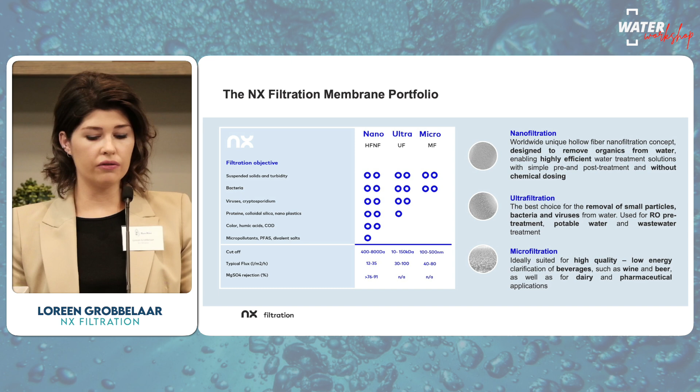The nanofiltration range has 2 products, the DNF80 and the DNF40. The 40 is a 400 Dalton cutoff, while the 80 is an 800 Dalton cutoff. These membranes were specifically developed to remove organics like your CODs and also micropollutants from the water.

This is basically without chemical dosing, so you don't need your coagulants and flocculants—almost a one step process. Our ultrafiltration range ranges between 10 and 150 kilodalton, and this is mostly for RO pretreatment or wastewater treatments, for virus and bacteria removal. Microfiltration is mostly used in the food and beverage industry, and our membranes are applied to clarify beer and wine.

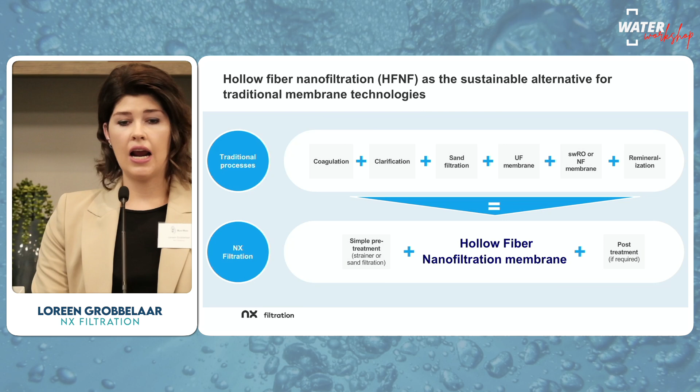Focusing on the nanofiltration range, we've seen in many cases that a traditional process—including coagulation, flocculation, sand filtration, UF and RO, usually with a remineralization process afterwards—can be condensed into a simpler treatment step.

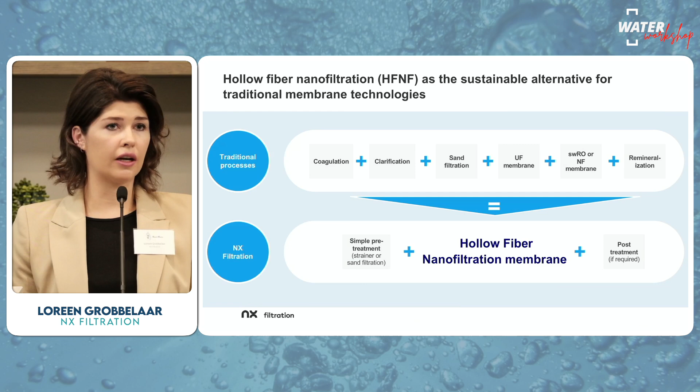Taking for instance a simple pre-treatment like a strainer or in some cases a sand filter, and applying that filtrate to a hollow fiber nanofiltration system with a post-treatment can give you the same water quality or even better.

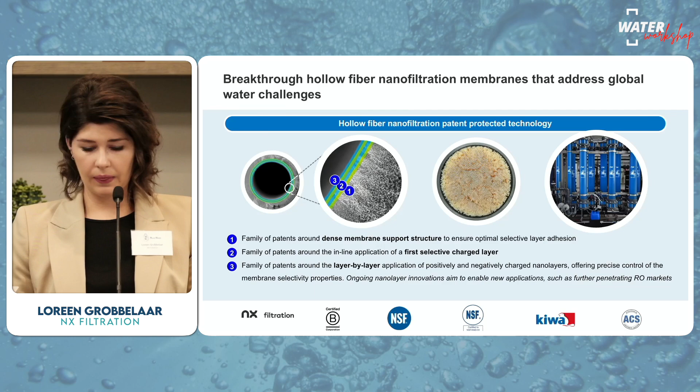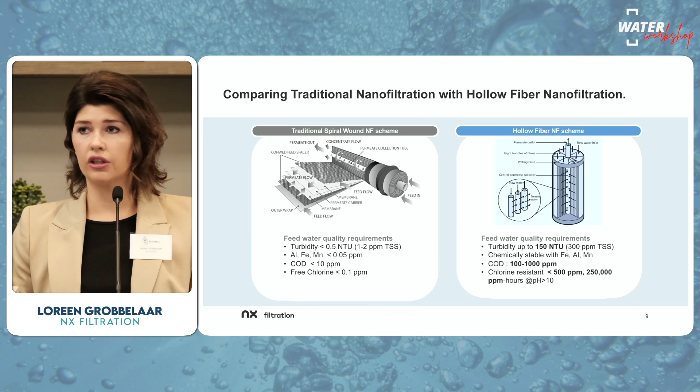Our membranes are chlorine resistant, so they can take chlorine up to 250,000 ppm hours at elevated pHs above 10. These membranes are also backwashable, so in many cases you would need quite extensive pre-treatment with your spiral wound nanofiltration membranes, which is not necessarily necessary for the hollow fiber membranes.

On the wastewater reuse side, we also do municipal wastewater. That's one of the sweet spots for our membranes. So after clarification, after the clarifiers, with a drum screen, followed by the nanofiltration membranes. The permeate can then be reused or even further treated for potable reuse. But I'll say more about that later after the tea break.

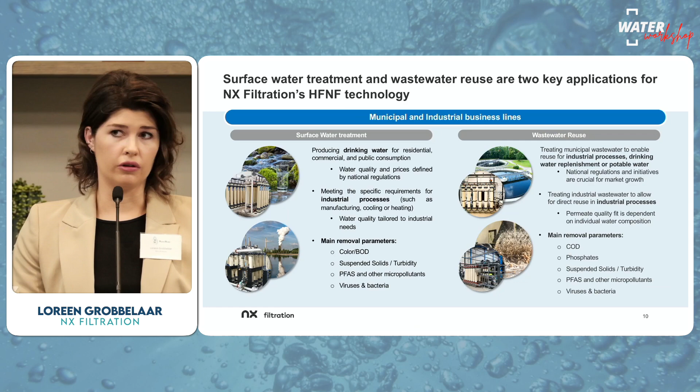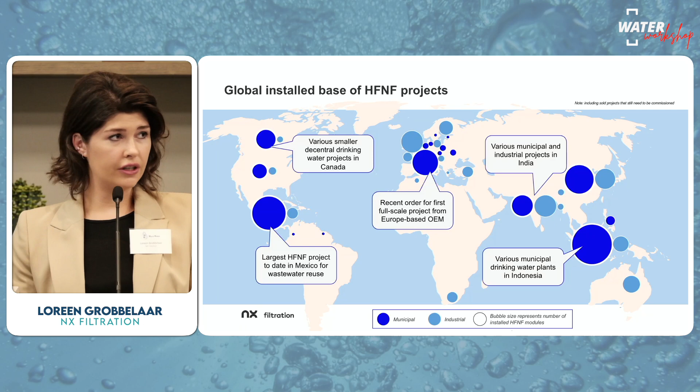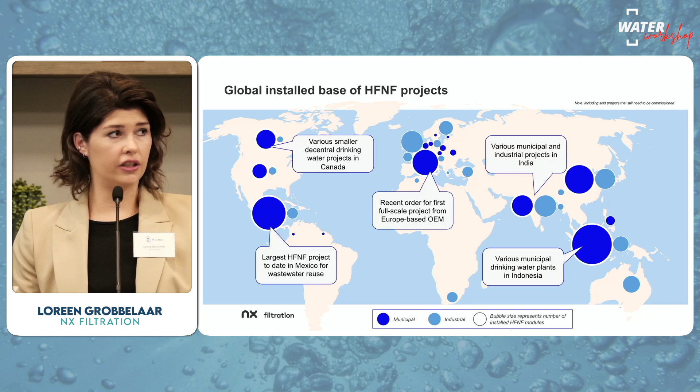Globally, we do have an installed base of nanofiltration membranes, mostly in the European region where we are based. But this slide is just to indicate that we also have installations in other countries in the world, also in Asia, Indonesia, Australia, and also Northern America.

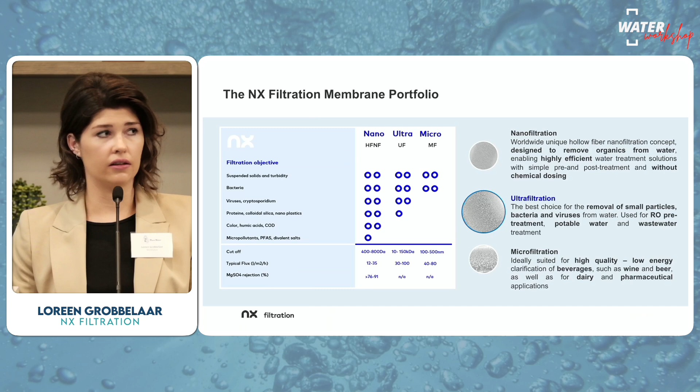Bringing up the slide again to highlight the ultrafiltration range. Like I've mentioned, smaller particles, 10 kilodalton to 150 kilodalton. The tighter membrane, the 10 kilodalton, is used mostly for silica removal, while the UF150 is the membrane usually used for RO pretreatment, for instance.

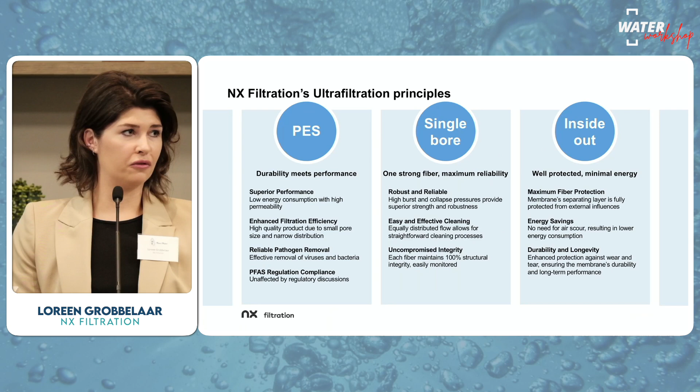Our filtration principles also apply mostly for the nanofiltration. All our membranes are PES based. They are single bore and inside out. So with the PES membranes, should you use our membranes, you could be covered for future regulations where PFAS could become an issue.

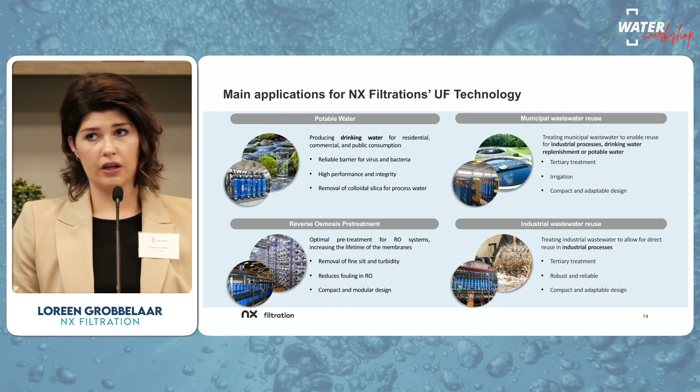On the ultrafiltration side, the main applications would be potable water, municipal wastewater reuse again, and reverse osmosis pretreatment. That's where we mostly apply our ultrafiltration membranes, and then also in industrial wastewater reuse. We've got a global base of ultrafiltration membranes, which might be something new to you because we are a nanofiltration company, right? So I will cover a little bit later that we also have a few replacement products available for the membranes currently in the market.

Just an overview of where we apply our ultrafiltration membranes. Water reuse in a poultry processing plant in Central Europe. Our membranes are applied after a sand filter, just before reverse osmosis, and I believe this water is then being reused in the factory again.

Here we use our WMC200 UF 150, so 150 kilodalton membranes. There are 4 skids, 40 modules per skid, and the membranes have been operating for more than 6 years. Fluxes of 40 to 50 LMH have been reached.

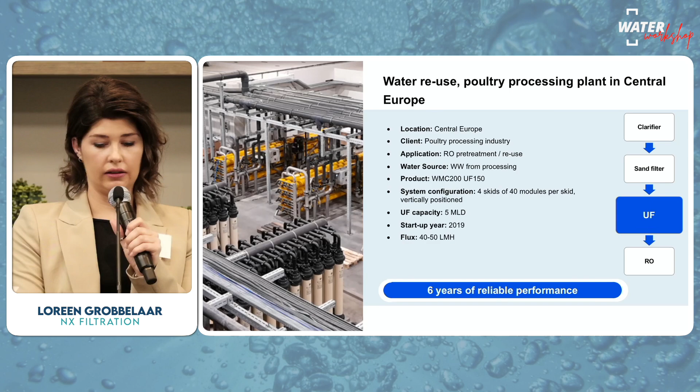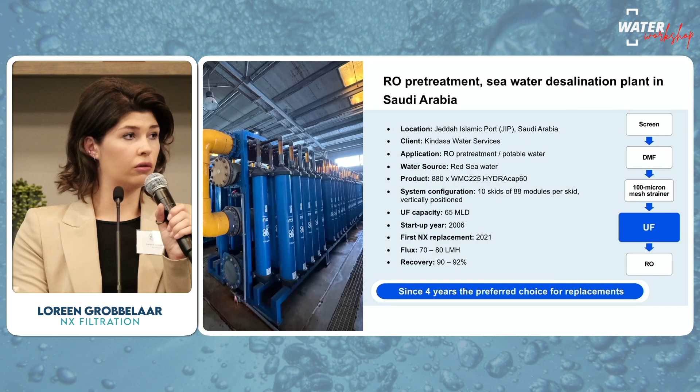RO pretreatment, so seawater desalination, this is in Saudi Arabia. At the port of Jeddah in Saudi, we have a customer, Kindasa Water Services, which was also one of the good performance declarations I've shown earlier. This is to treat the seawater from the Red Sea. There we've got 880 modules installed, the HYDRAcap60, which you might be familiar with from the Hydranautics range. System configuration, again, 10 skids, 88 modules, and our first replacement was in 2021. High recoveries of 90 to 92%, and this is also just before reverse osmosis, more than 4 years.

Then a seawater desalination plant again in India. Also 30 skids, 120 modules, and here we've got one of our most recent developments of ultrafiltration membranes installed, 55 square meters, and that's also UF 150. We're operating at fluxes of 80 LMH and reaching an SDI of less than 1. Again, lamella clarifier, disc filters, ultrafiltration, and then reverse osmosis.

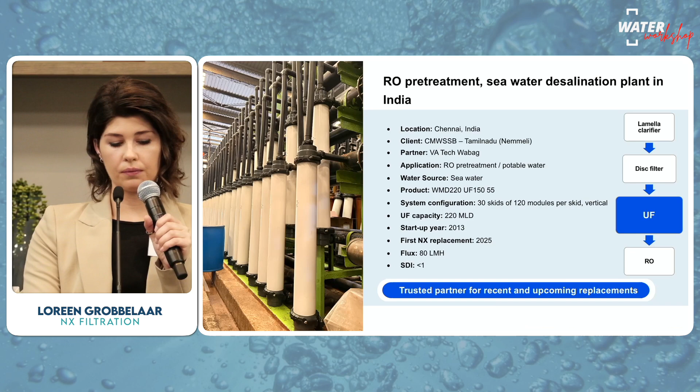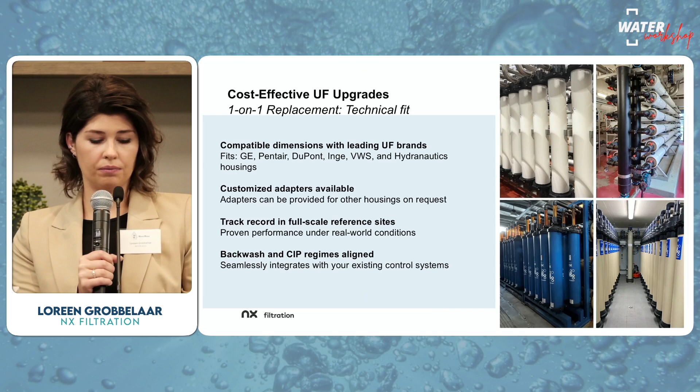Like I've mentioned, we can replace our membranes cost effectively with a one-on-one replacement. It's a technical fit with most of the membranes currently in the market, and our membranes can fit GE, Pentair, DuPont, Inge, Hydranautics, and also VWS. In cases where we do need adapters, we have those available, so we can do a retrofit, or assist with a retrofit to your needs. All of our membranes are backwashable, and the normal CIP and cleaning ways are acceptable.

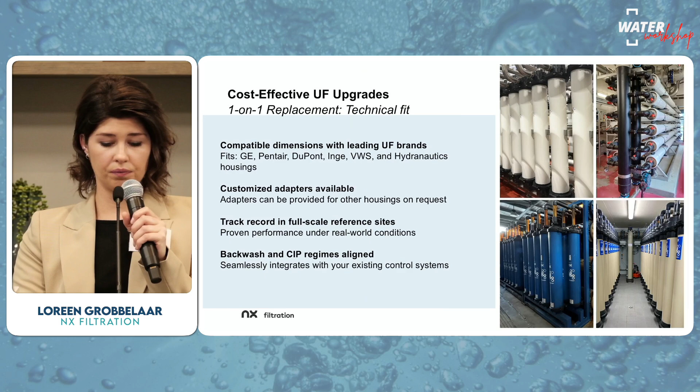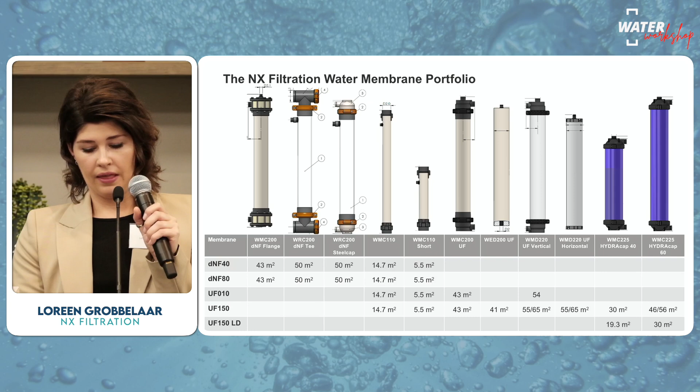So yeah, I believe if you would like to discuss any replacement projects, I'm more than happy to discuss that further.

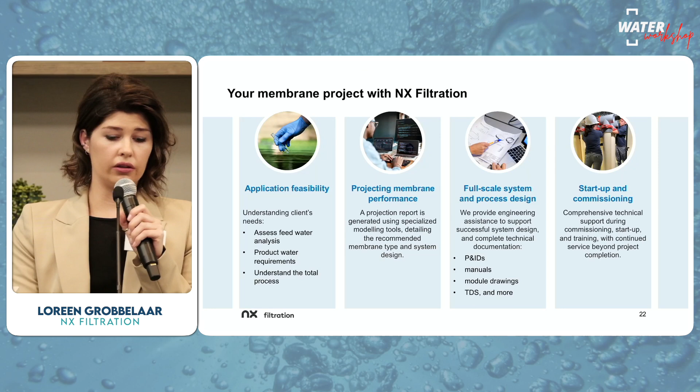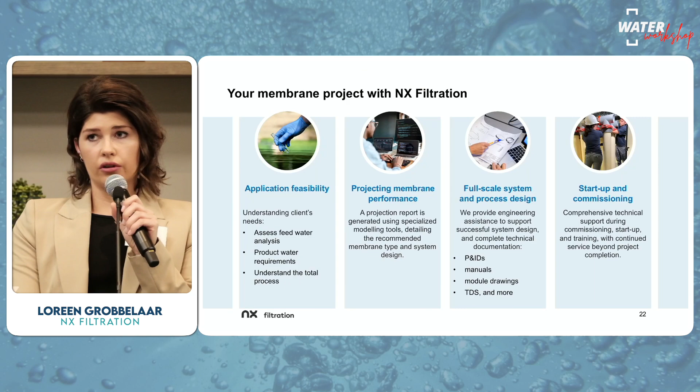Should you want to develop a membrane project with NX filtration, we do application feasibility checks within our sales engineering team. We have our own in-house projection software, so we usually assist with that. We also assist with full-scale system design, so should you need information or assistance checking P&IDs, we have that expertise within our team.

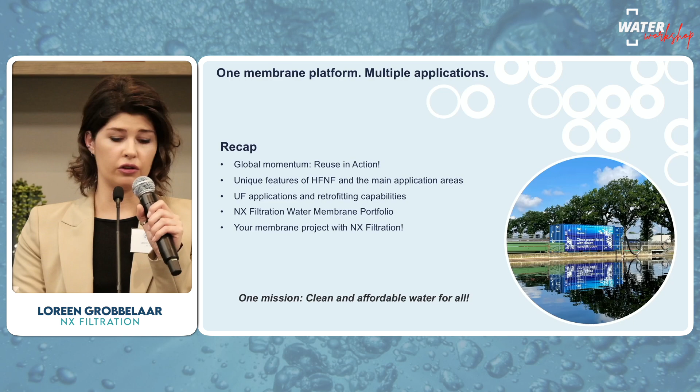So just to recap, I mentioned a little bit the unique features of HFNF and the main application areas, which is surface water and wastewater treatment, as well as UF applications and retrofitting capabilities, our membrane portfolio, and how you can develop your project along with us. I think in the end, we've all got one mission, and that is our motto at NX Filtration: clean and affordable water for all. So, thank you.

Basically, the PVDF manufacturing of PVDF membranes would eventually become subject to regulation, where PVDF would fall under the PFAS regulations or micropollutant regulations, and that is where we are already covered from a manufacturing point of view, to be all right with continuing our manufacturing.

So does that mean that people making PVDF membranes... I mean, it's kind of bizarre. You're making membranes to treat water that are causing a PFAS problem. Is the PVDF manufacturing using PFAS material? Is that what it is? Yeah, that is it. I didn't know this. I learned something today. Okay, thank you. Thanks, Rob.

You mentioned that you don't require chemicals for the process, but with nanofiltration systems, you generally do find there is a scale challenge. So I'm wondering how this system manages that challenge. Yeah, thank you. In some cases, we do see there would be an anti-scalant requirement, and then we would recommend the customer use an anti-scalant. But in most cases where we see there's no scaling warnings coming up in our projections, we would be comfortable running without an anti-scalant.